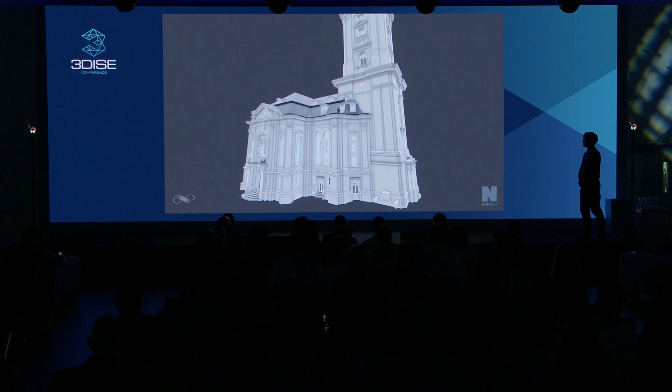Now, many of you might be inclined to ask yourself, what's the method? How did they capture the data? What hardware did they use? How did they model? What was the level of detail? These are all valid questions that dominate day-to-day conversations in our industry. But I want to take a step back and appreciate the fact that we just watched a video for about a minute and were able to get a pretty good first sense of the scan quality of the model and the overall effort that went into this project. And I think that's true for both experts and novices. Since there are many more people out in the world not familiar with our services and technologies, it's important to dwell on that fact. Today I want to talk about how we can leverage this potential into expanding our scope.

And I think it all starts with us. Every day we have two roles, two shoes to fill. We are enthusiasts - we explore new technologies, develop new solutions, and deploy them for our businesses. But at the same time, we are advocates. We talk to developers, property owners, designers, architects, and many more who might be interested in the technologies and services our industry offers. I think it's important to lean into this role, into becoming advocates on a day-to-day basis, in order to expand our reach.

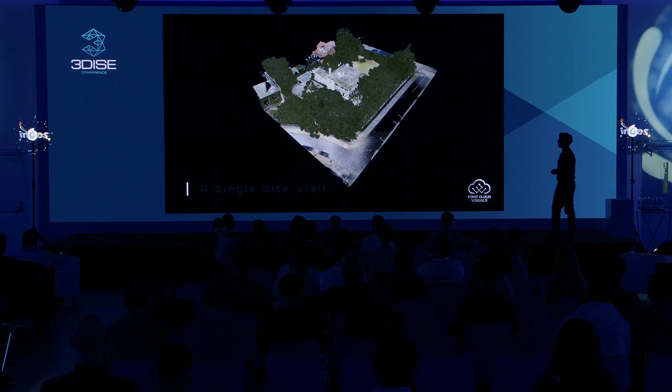The second one is by Alexei, who's based in Armenia but recently moved to Italy and submitted this video.

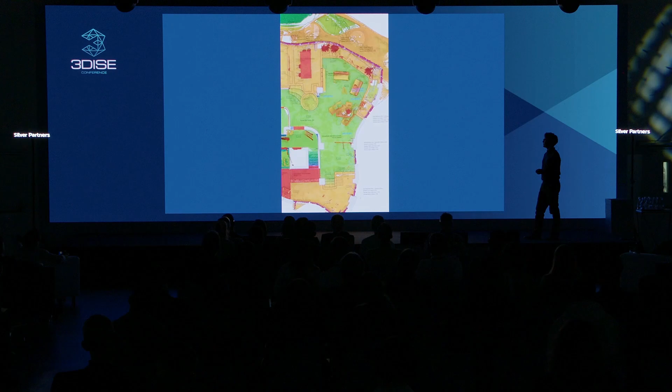And finally, we have Jeremy's work, which is based on oil and gas facilities.